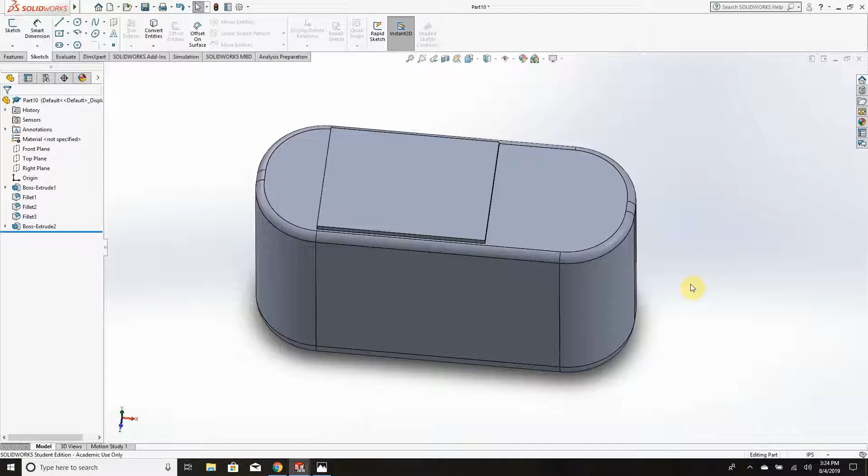Welcome back. This is session 2 of the brick plug part. We're now going to add the plugs to the top of the part on this rectangular surface here that we had discussed in session 1.

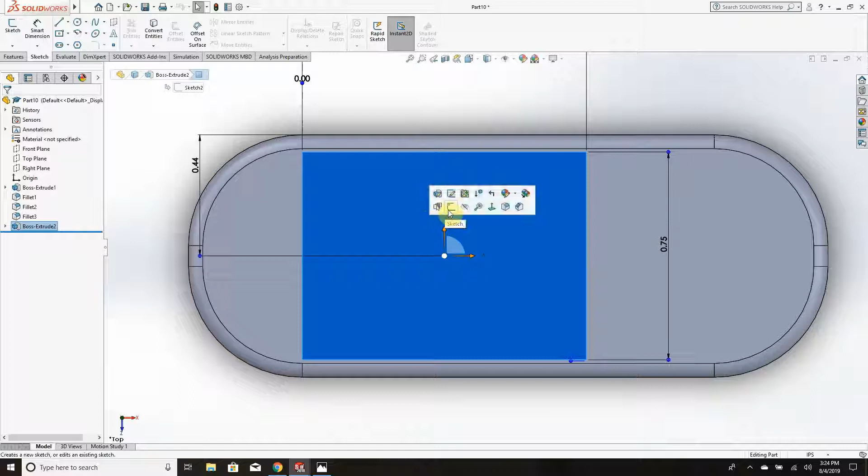I'm going to square up the part. This is the section right here, the rectangle that we're going to put the plugs in. I'm going to pick it, pick sketch, and pick rectangle. I know we're using the rectangle tool a lot - we'll get to some other tools a little bit later.

Those are the two plugs, obviously. They are of different sizes. This is where you're going to learn how to use relations. I'm going to pick Smart Dimension. The thickness on these are a 1/16 or 0.0625.

Now we have the thickness on that one, which is good, and we have to add the thickness to this one. Now I could dimension this, yes, that would be easy to do, but instead what I'm going to do is go up to the display, delete relations, and click on add relations.

You'll see this box here where it says select entities. I'm going to pick that side of the rectangle and that side of the rectangle. You'll see line 1 and line 7 - that's line 1, that's line 7.

Then down here I'm going to choose what I want to do. I could make them horizontal, I could make them vertical, I could make them all these things, but I want to make them equal. So this dimension from here to here is 0.0625, the same as this one, and you can see by the little equal sign that that's the case.

Now what does this do for us? We also have to hit that check mark to make sure it takes effect. What this does for us, since we didn't have to dimension it twice, if I double click on this and decide to make this 0.09, it changes both of them. So I only have to change one dimension now.

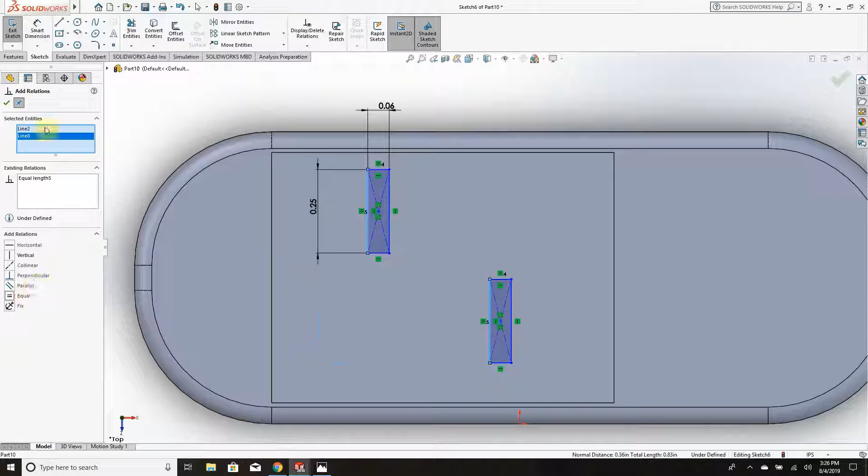So I'm going to go add relation. I'm going to click that side and that side. I want them equal. Check mark, and there you go.

Now you can look at that and say, well, that's great, but why are they uneven? Well, let's use relations again and make them even. What I can do, and this is a different type of relation, I can go to relations.

I'm going to get rid of this one, get rid of that one, and this time I'm going to pick the very middle circle or dot in each of them, and I'm going to say I want to make them horizontal. So if I click on horizontal, now they're perfectly horizontal. Click OK. Now what does that do for us?

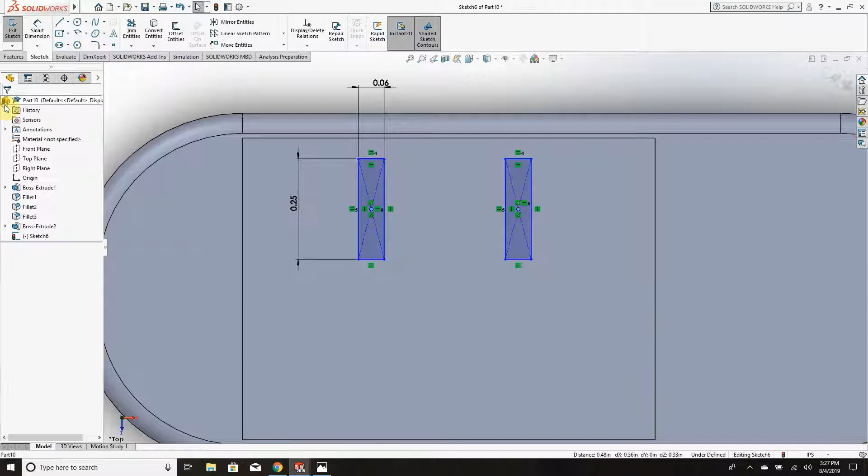Well, first of all, it gets them exactly where we want them. But if I move one, it automatically moves the other, which is key because this is a plug and they have to be the exact same size apart.

One dimension that I have to add, I want to add a dimension in between these because we know that these are a 1/2 inch apart. Okay, so there's the 1/2 inch apart.

Now we have to center them. We want to center those on this rectangular piece. Well, we just do that again by dimensions, the same as we've done before.

I can take a smart dimension from here, which is the middle of that rectangle, to the side. I can bring that out. Now we know what this should be. I want this right in the middle, which is 1/2 of this overall depth, and we know that's 0.437.

But notice when I do that, it's also going to move this one. Why? Because we made those 2 points relational. It moved them both down.

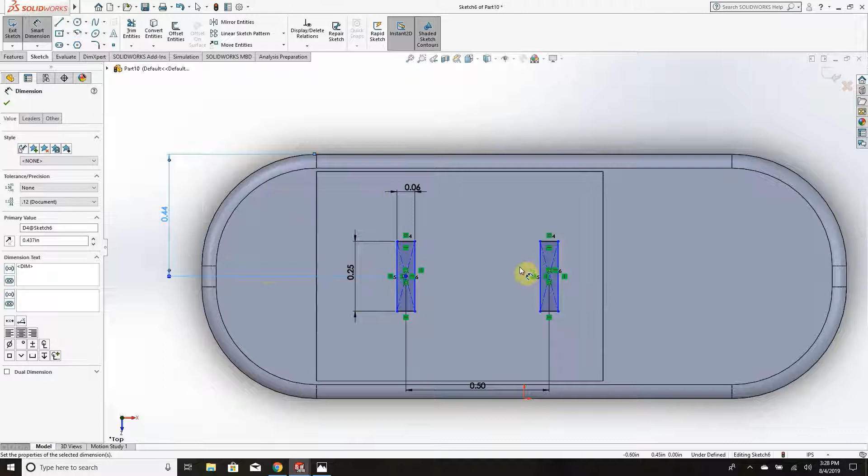Now we also want a vertical dimension in there somewhere, and we just happen to know, because I measured it, that from this point to this point it's 0.25.

So if I click off there, those are my plugs, or the sketches of my plugs. Now I want to extrude them. Let me go back. The nice thing about these relations is whenever I change any of these dimensions, it automatically changes it here. And if I relocate this rectangle, it automatically relocates that rectangle, which is pretty cool.

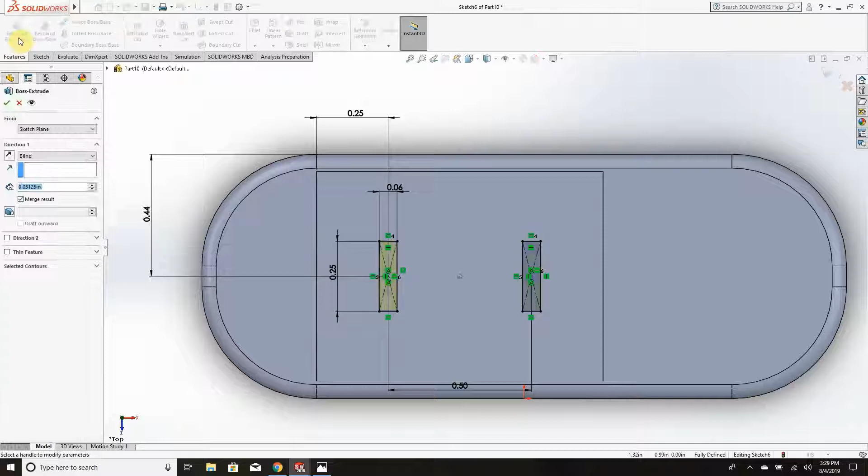All right, now I want to do the extrusion. So if I go to extrude, like I said before, our last default plug depth was 0.03125, which is what that is. Obviously we don't want that. We want that to be, I believe it's 0.5. And we'll hit OK.

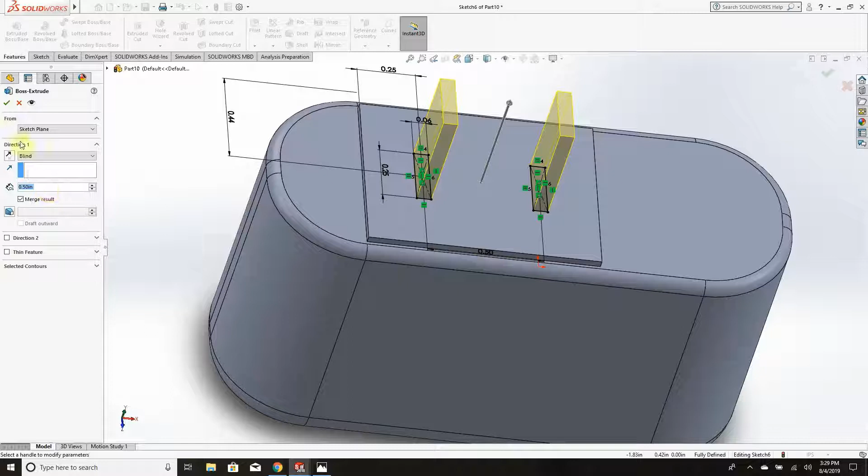And there is our plugs. Now, that looks kind of weird, obviously. They're square. They don't have the little hole in them and all that. So let's go back and do that.

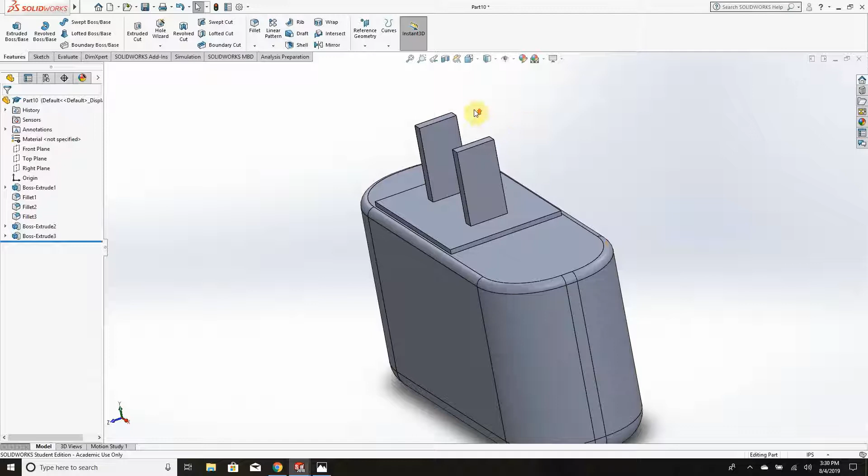One of the easiest ways, like we did on the brick, is just by shaping it using the fillet command. So I'm going to use the fillet command. I'm on full preview so I can see what it's going to look like. I'm going to click that one. Now I can tell already that's going to be way too big, so I'm going to come down here and put this at 0.05. I can change it later.

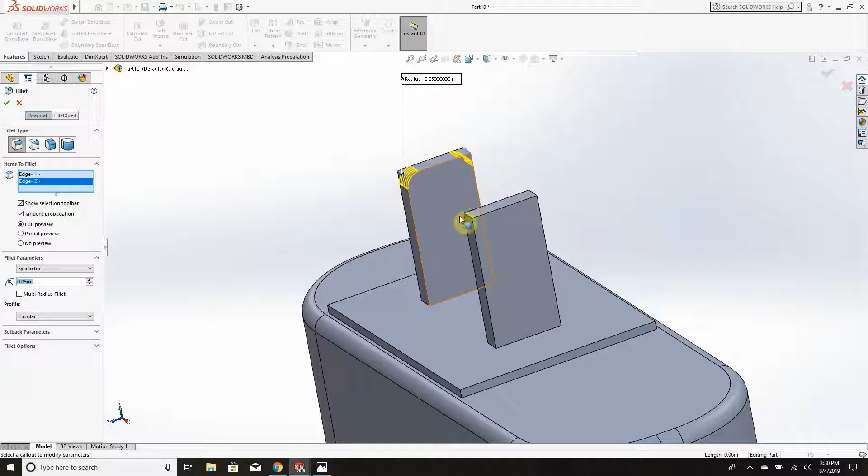But those, all I got to do is touch those surfaces. I want to make those a little bit bigger. I can make it, I'm looking at 0.1. Yeah, 0.1 looks good. I'm just kind of going for a look at this point.

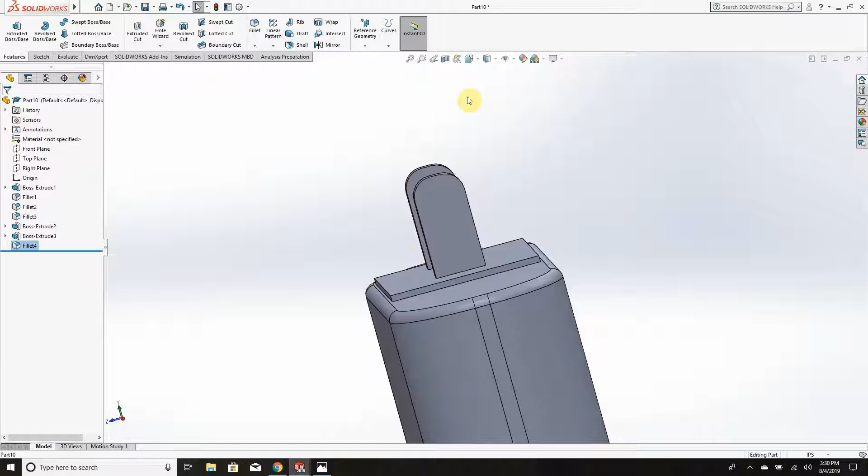All right, now I want to put that hole in the middle. So to put the hole in the middle, I want to sketch on this surface here. I'm going to square it up again, bring in just that piece. I'm going to pick that. I'm going to say sketch in that surface. I'm going to pick circle this time.

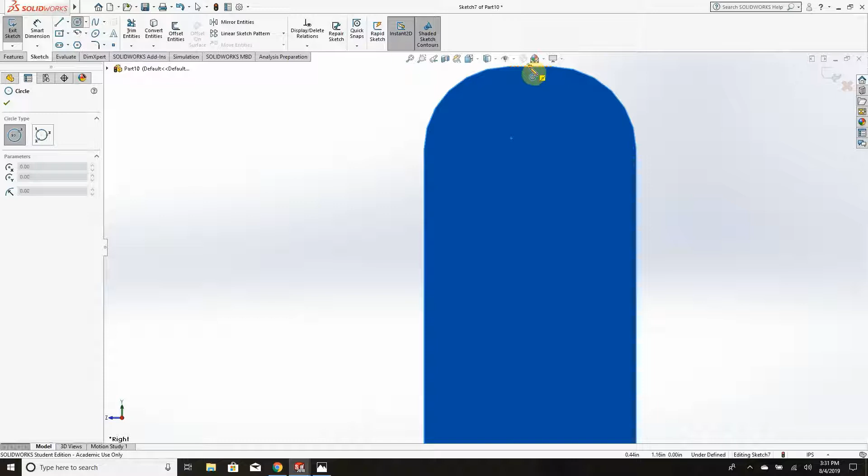Now, one thing I'm able to do is come up here and get the exact middle. You see that little box, that little orange box? That tells me the exact middle of this plug or this tab. So I've already lined it up. I don't have to put a dimension in there. I could bring it down a little bit, which I think I'm going to.

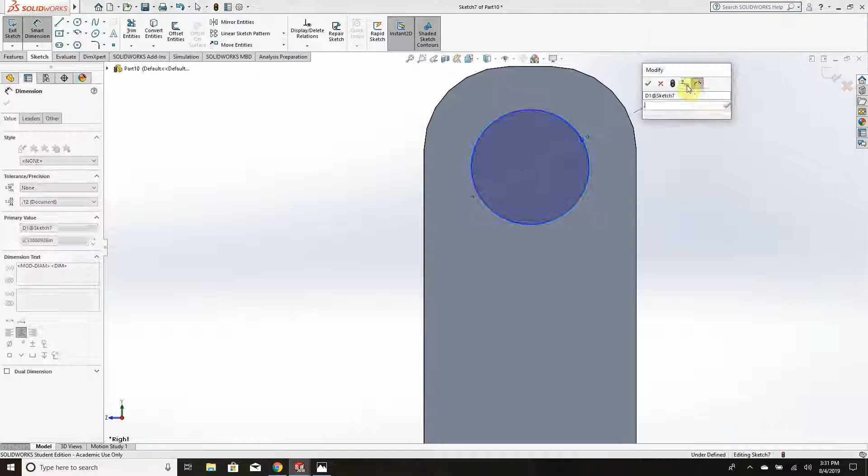I want to dimension that hole, which is 0.125. And like I just said, I'm going to bring it down a little bit. It's a little high. 0.125, we're going to go to 0.1875. That's a little bit better. Probably can be a little bit higher than that. Let's go 0.15. There we go.

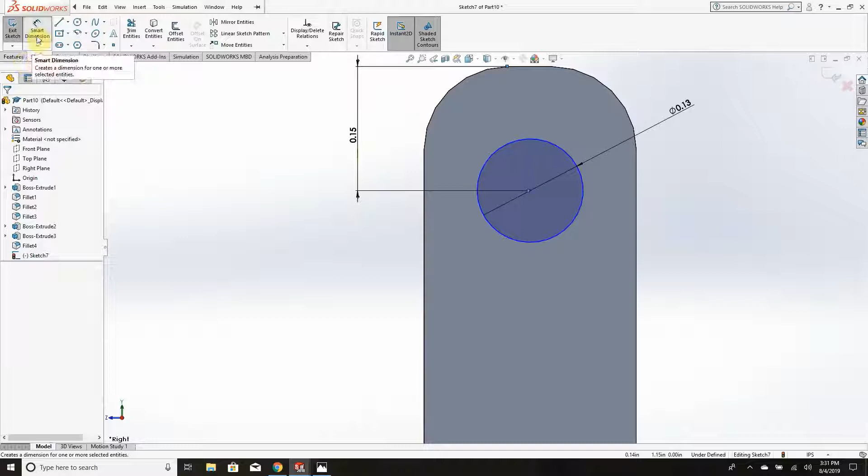Okay, now I want to extrude that all the way through both of these. So I'm going to go to Features, Extruded Cut this time, and you'll notice, because of the last default, it already went all the way through.

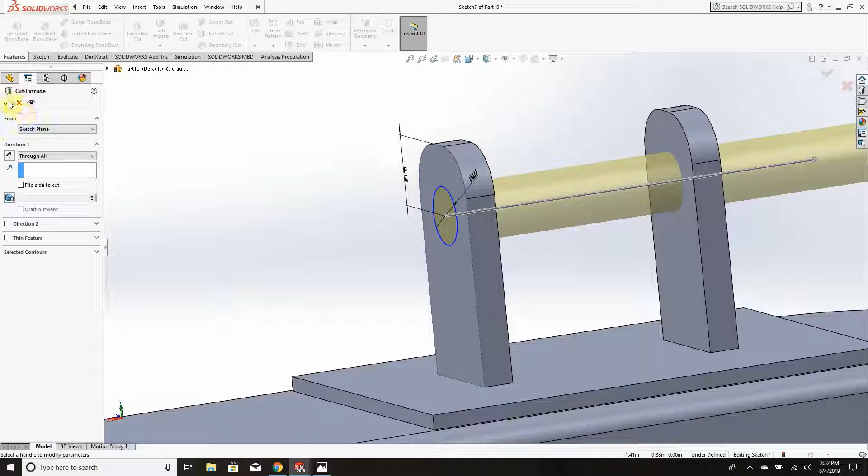I can make that bigger if I want. Again, I can change directions, don't want to do that though. I can make it longer, like that if I want to. I can do this just to make sure it goes all the way through, or I can click down here and say through all, which will make sure it goes through all of whatever is there. I'm going to hit OK, and there is the plug.

Now, what I want to go back and do, I want to make this look a little bit neater, and I'm going to make those a little bit longer. They don't look long enough. So I'm going to put a little bit more radii on these, just to make them look better.

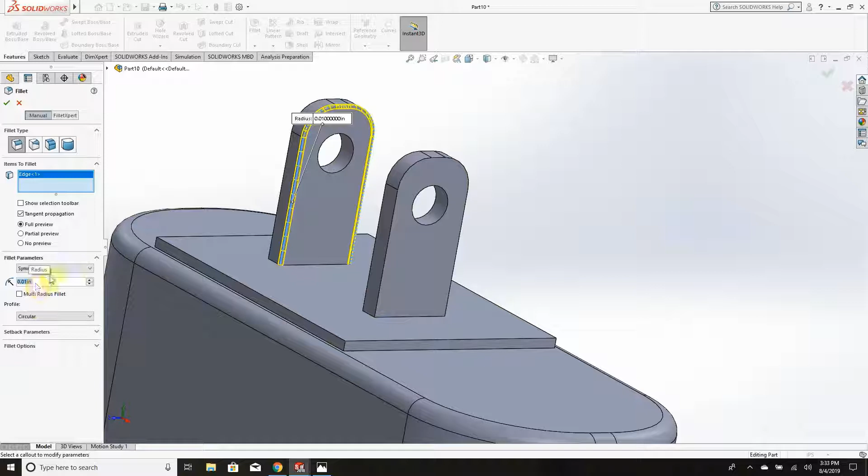I'm going to go 0.02. Let's see what that looks like. That's too much. I'm going to go 0.01 and go half of that. We'll click on that one. We're even going to go do the circles. And hit OK. And that makes them look a lot better.

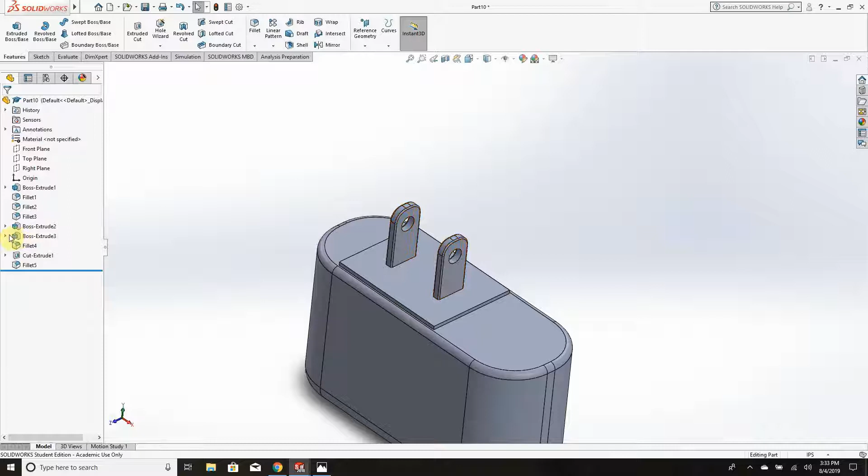Now I'm going to go back though right now, and I'm going to make these a little bit longer. I think I'm going to make them, well, maybe another 1/4 inch. To do that, I have to go back to where I extruded them, which happens to be this area. So if I go to the drop down and click on that, it says Edit Feature. Go to Edit Feature, and there it shows my extrusions.

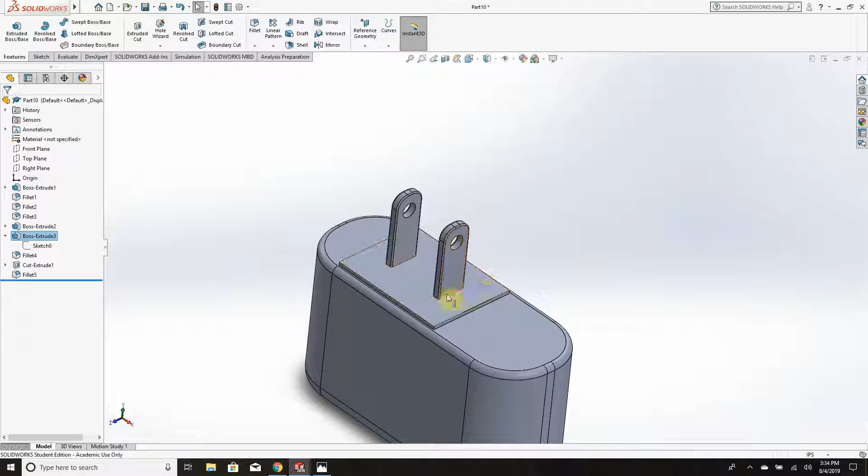I'm at 0.5. I'm going to go 0.75. No, I'm not, I'm going to go 0.625 because that's actually what it is. I hit OK, and as you can see, it kept all my other features, no problem. All it did was added the extrusions. So there are the plugs. Okay, on session 3, we are going to add the wire.